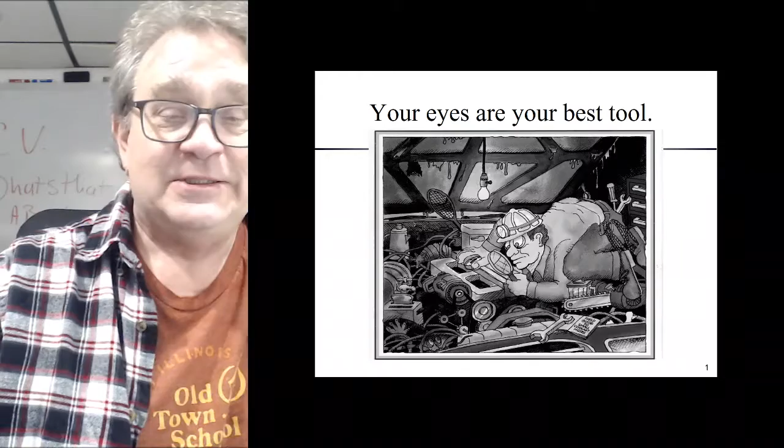Anyways, safety first. Never open a radiator cap on a hot engine. It can flash boil, and we'll talk more about this in a minute, but just realize we need to check and make sure before we open up the cooling system that it's not pressurized and not hot.

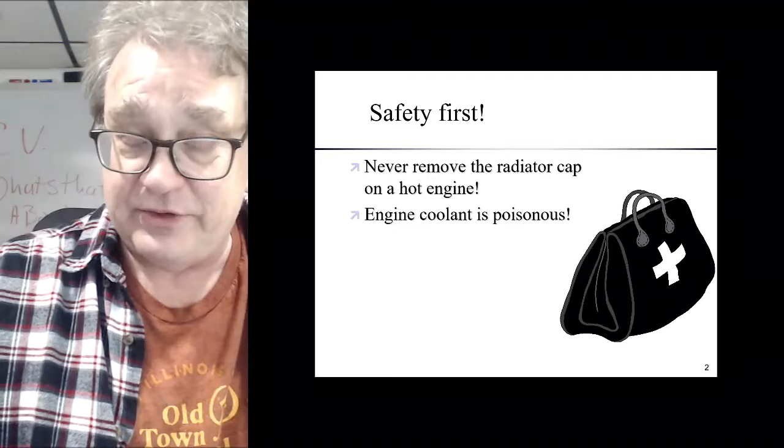The antifreeze is poisonous. Some less so, but just treat all antifreeze like it's poisonous. Read the label on the bottle first before any first aid is administered. Really try not to lick it. It's also very slippery on a shop floor. Clean up after yourselves, it can get quite slick on an epoxy coated floor.

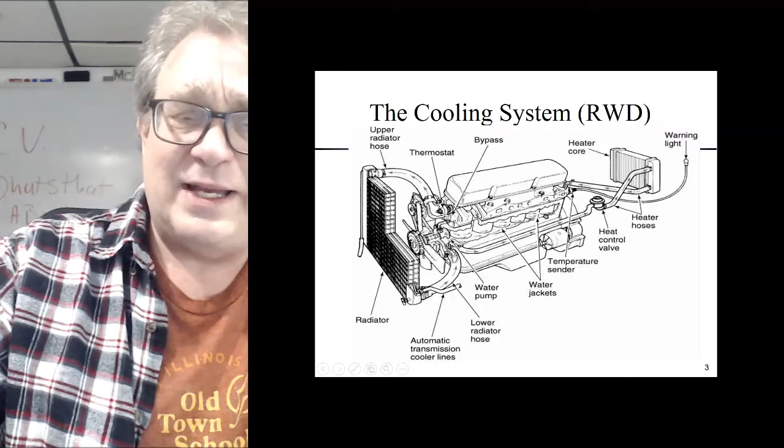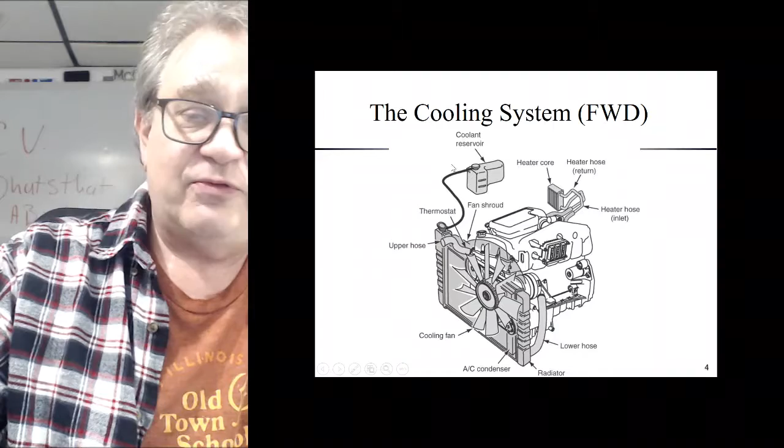Front wheel drive stuff is much more compact. We have basically the same parts, but instead of having a mechanical engine-driven fan, generally we have an electric fan. We have overflow recovery tanks and we have surge tanks. I'll talk about the differences.

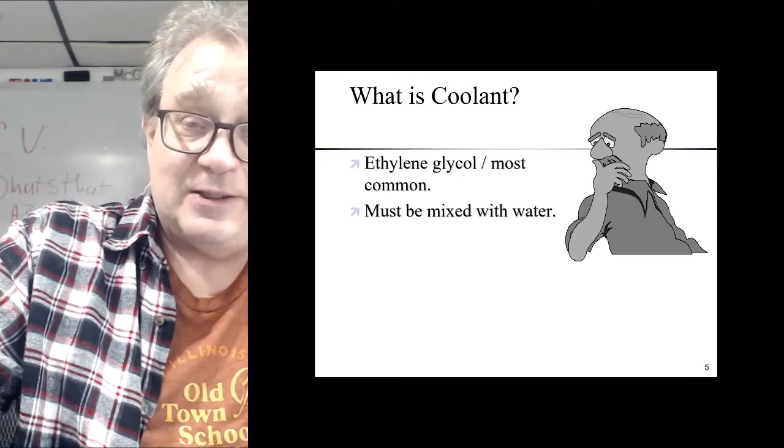So what is coolant? Well, ethylene glycol is probably the most common, and then we have propylene glycol as well. But by far the largest ingredient in it is water. Now, water freezes at 0 degrees, and that is a problem in the colder climates like it is here. Almost all manufacturers recommend a 50-50 mixture. Down south in Florida and stuff where it doesn't get as cold, they tend to use just straight water, which is a mistake. There's also other ingredients in there.

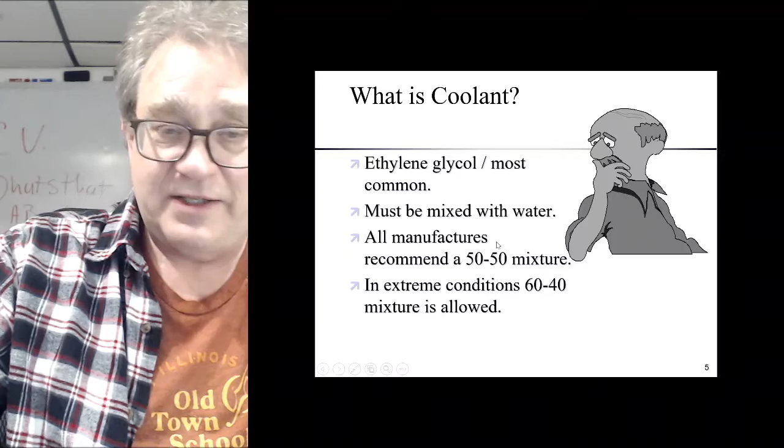Now, we can go to an extreme, a 60-40 mix is allowed, and that gets us much lower freeze temperatures of the antifreeze, which is what we're trying to get away from.

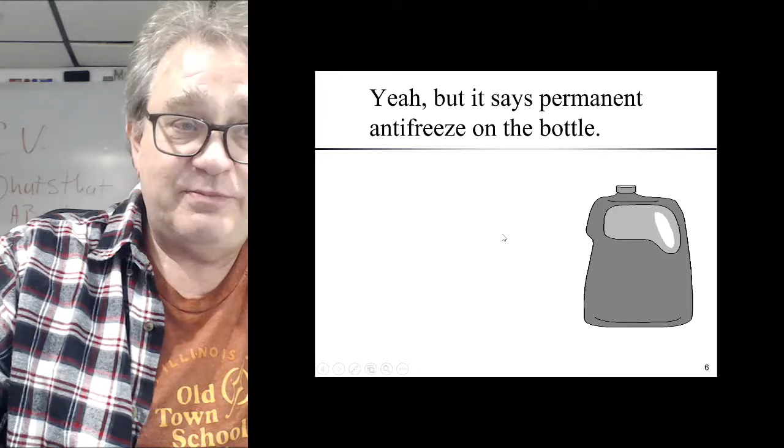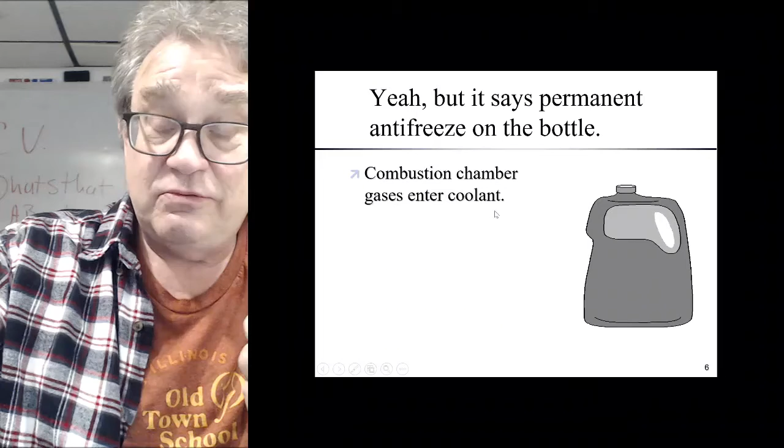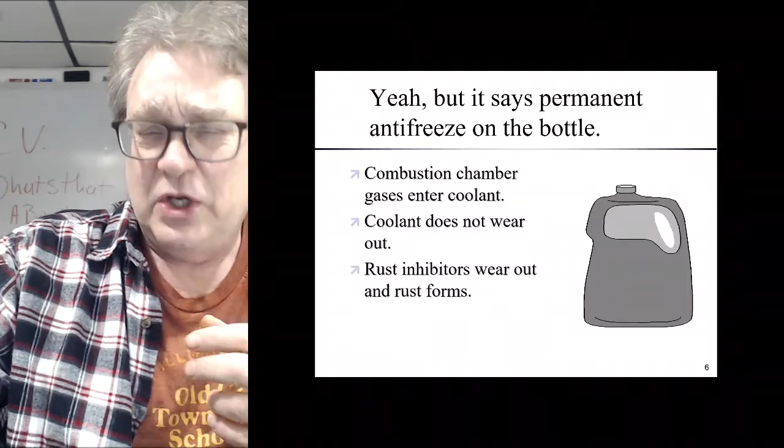We hear a lot of manufacturers talk about permanent antifreeze that doesn't need to be changed. Well, honestly, yes it does. We get some combustion chamber gases into the coolant, nothing is perfectly sealed, and that in turn gets acidic over time. The pH changes, and we end up having an issue with corrosion inside the cooling systems. Coolant does not wear out. It's not the freeze property that wears out, but it's the rust inhibitors and water pump lubricants. There's really only one moving part inside there, and that's the water pump.

So what do thermostats do? Well, they open and close, and when closed, it allows the heat from the engine to build a lot more rapidly than if we circulated it through the radiator. That gives us better drivability and lower emissions. A hotter engine is a more efficient engine, and that provides us with better fuel economy. And as a side benefit, it keeps us warm, which is a good thing.

Back a long time ago, they didn't have heaters, it was just cold. That's where they developed car blankets.

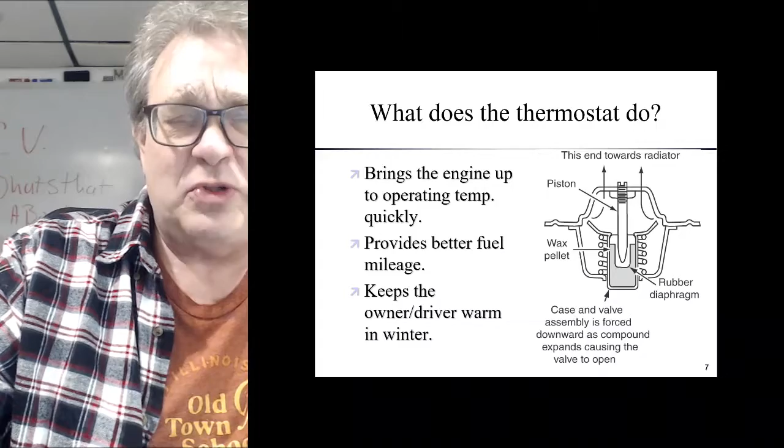Anyways, so how does it work? Well, once the engine starts to heat up, if we started cold, it just runs through a bypass, so the water pump is circulating it inside the engine. We do this so that we don't develop hot spots in the engine. We circulate the antifreeze around the engine, which helps stabilize the temperature. We can't have one part of the engine getting hotter than the other part, because differing rates of expansion would cause it to blow seals and stuff.

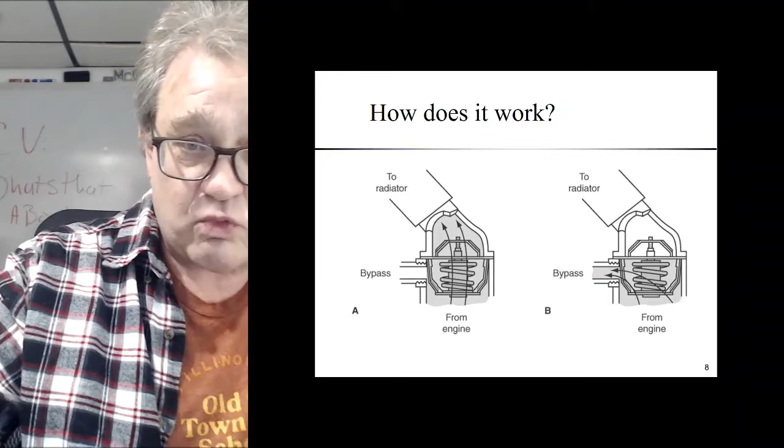So during this warm-up phase, the thermostat is closed, but there's still flow inside the engine, mixing the antifreeze. Then once the thermostat opens at a given temperature, generally about 190 degrees, it pushes the antifreeze through the larger hose to the radiator, where there's air moving across the fins, which helps the antifreeze cool by dissipating the heat using the wind from the ram air effect or the fan. Looking at the radiator itself, it has corrugated fins in between tubes that carry the antifreeze. These fins just help it have more surface area so it can dissipate more heat.

Most radiators have an oil cooler inside. This is an oil cooler for the transmission generally, a transmission oil cooler. These are prone to leaks, and Nissan's had some issues with this.

Quite a few of them. We have the Dodge Dakota in the shop right now that leaked, and it blew all kinds of antifreeze into the transmission, which is really bad.

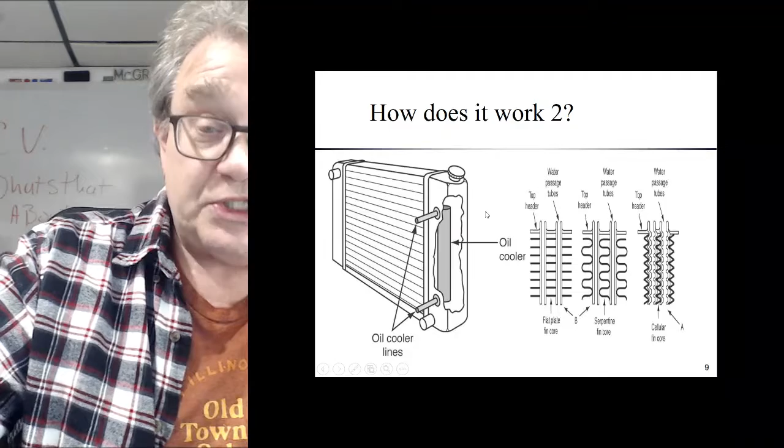So we look inside the engine. We have our water pump assembly, and then we have our cylinders. The compression, the combustion event inside the cylinder creates heat, which is carried away by the antifreeze. The water pump circulates this inside the engine to help pick up the heat. Then when it reaches the correct temperature, the thermostat opens and it flows through the radiator. Also, there's a separate circuit for the heater core to allow the antifreeze to go into the heater core.

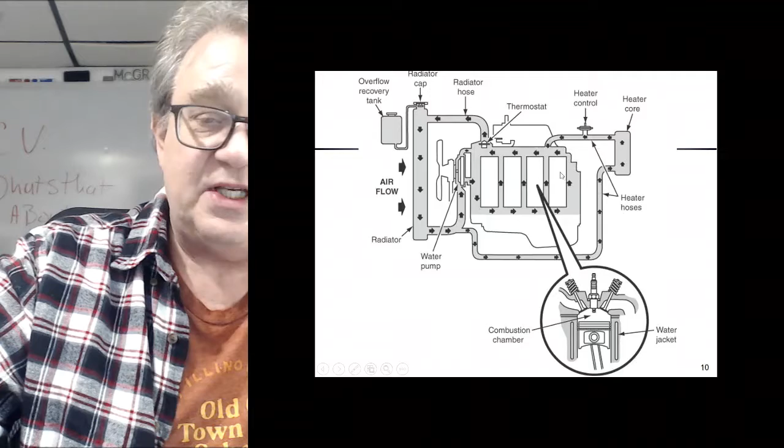Radiator cap and recovery bottle. We keep the cooling system under pressure, because if we keep it under pressure, it raises the boiling point. For about every 1 pound of pressure inside the cooling system, we raise the boiling point 3 degrees Fahrenheit. So a 15-pound cap raises the boiling point by 45 degrees, which puts us at almost 250 degrees. A typical modern vehicle runs at its normal running temperature of about 225, 230 degrees. Some of the more modern vehicles are even running hotter than that.

As long as we keep it in that window, the engine can withstand that. If it gets above that, we start to have issues with cracking, blowing a head gasket, and cracking a block or cracking a head. Usually that's due to overheating.

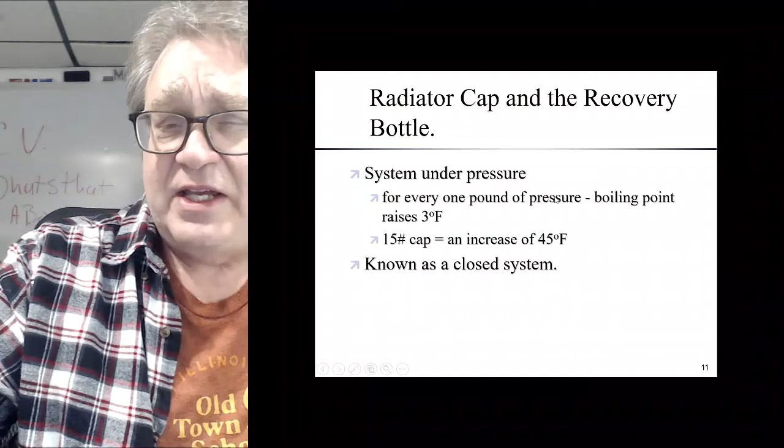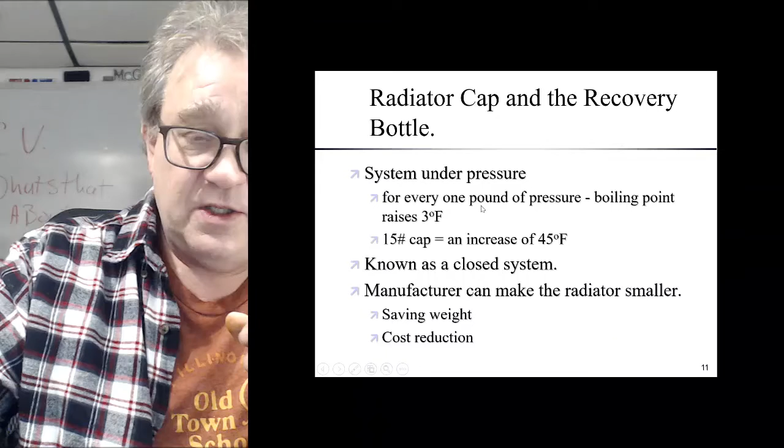Now, this is a closed system, so it does build up pressure, although there is a relief valve in there. Raising this pressure and raising the boiling point allows manufacturers to keep the radiator and cooling system smaller than it needs to be, compared to an unpressurized system, which we did have a long time ago. Now, this pressure is contained by the radiator cap itself.

The radiator cap has 2 valves in it. One valve releases pressure when it gets too high, and then once the system cools, it contracts back down. The antifreeze contracts back down, and there's another valve, a vacuum valve, at the base of the cap that draws the coolant back in from this recovery tank.

You get this? It holds pressure, and this is what the radiator cap does, it regulates the pressure. It's this spring right here that gets pushed up. Let's say it's a 15-pound cap. At about 15 psi, it lifts up ever so slightly and bleeds off antifreeze and pressure into the recovery tank.

And then when it cools off, it's the reverse that happens, a separate valve opens, and that draws the antifreeze back in from the recovery tank. That's why we have full cold and full hot marks on the recovery tank. Because when it's hot, it's pushed some fluid out, so that level inside the recovery tank is going to rise, and then when it cools off, it's going to drag it back down.

Now, where do you think this pressure comes from? I'll just tell you, the pressure comes from the expansion and contraction of the coolant. The coolant gets hot, it expands. That expansion creates more pressure, which raises the boiling point.

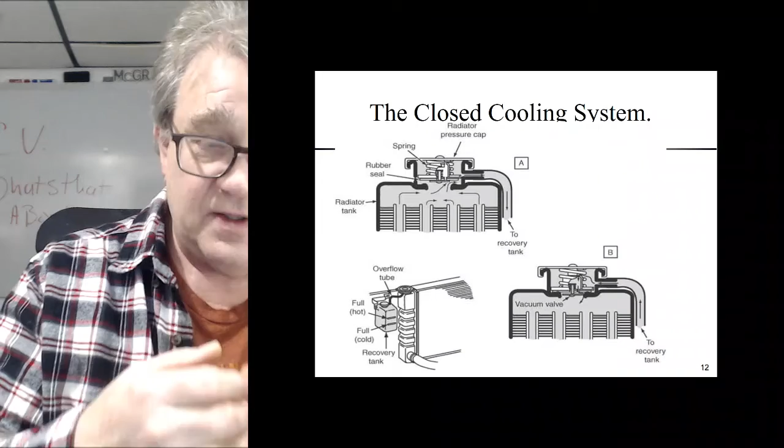It flash boils. Where does it do this? Well, right around the cylinder jacket, around the hottest part of the cylinder. We get this sudden flash boil of the antifreeze, and then that expands, because steam expands. That's why we get an explosion of coolant out of a hot engine when we take the cap off. It's not so much just the pressure that's in there, it's the sudden flash boil that happens.

We okay with that? No. We're going to take a break and come back to phase 2.